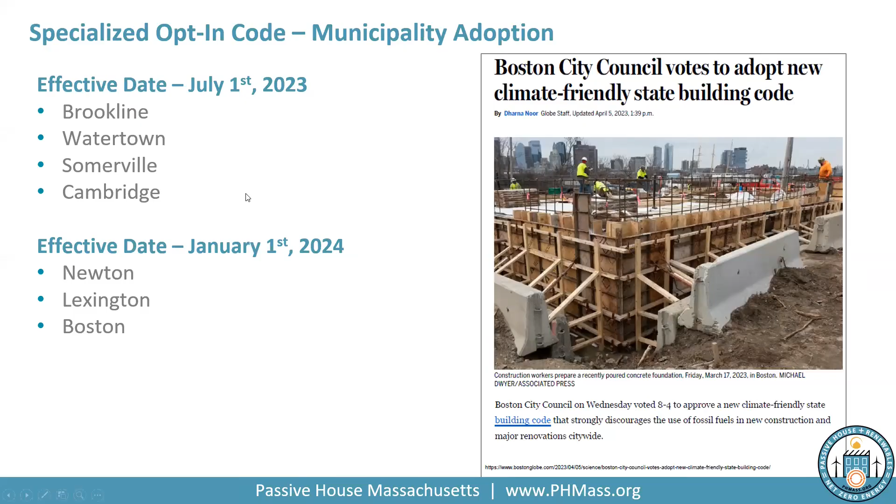So transitioning now into the meat and potatoes of our session tonight on non-residential homes. As we all know, the new code's improved pathway, passive house, is an improved pathway in the new code, both in the stretch code and in the specialized opt-in code. We've been doing a lot of talking about the residential and multifamily project implications of this, specifically with the specialized code requiring multifamily projects over 12,000 square feet to be passive house.

I don't know if folks out there know quite the implications of Boston doing this, but last year I think they had around 45 or so multifamily projects go through the permitting process in the city, and only a small amount of those were passive house. This means when it goes into effect in Boston in January, we're looking at 40-some new passive house projects, which is really exciting. But for this session tonight, the key takeaway is that it's not just residential projects we're talking about in the code.

Passive house is an improved pathway for all building types. So whether you're a single-family residential building, a townhouse, a multifamily building, or one of the many other building types out there, you can use passive house to meet code.

So tonight we want to highlight all the different types of buildings out there that are implicated by this. We're talking about schools, museums, hospitals, city halls, and other municipal buildings, all different types that can now use passive house to meet the energy code. So for those of you in different cities and towns considering the opt-in code and thinking about the impact this will have on residential projects, consider the commercial projects that will also be able to take advantage of this and use passive house to meet the code.

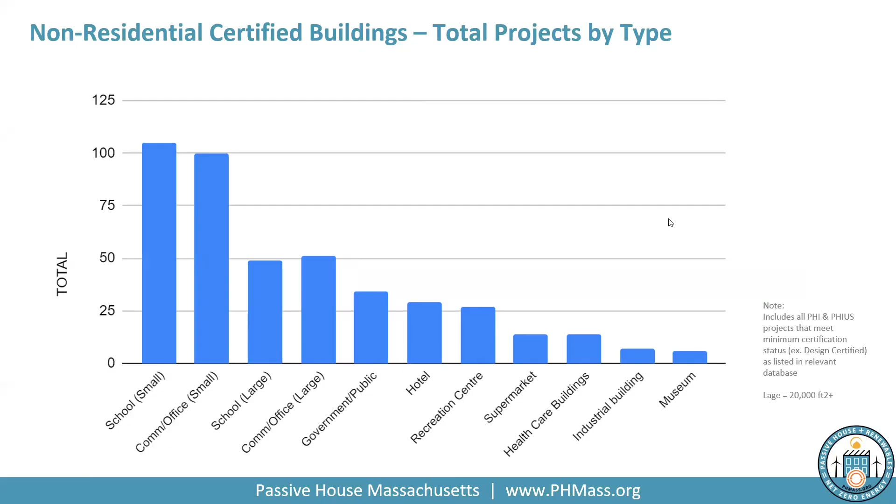That's what we have here. As you can see, there are a wide variety of non-residential projects around the world. We have some here in North America and in the US, but not as many as we've seen around the world. Part of that is simply because Passive House started in Europe much earlier than it did here, and they were much quicker to adapt it to a wide variety of building types. The first Passive House building in Germany was a multifamily building, so they went to multifamily versus single family right away, and very quickly into commercial and other building types. We've been a little slower here in the US, so all of us can work on changing that.

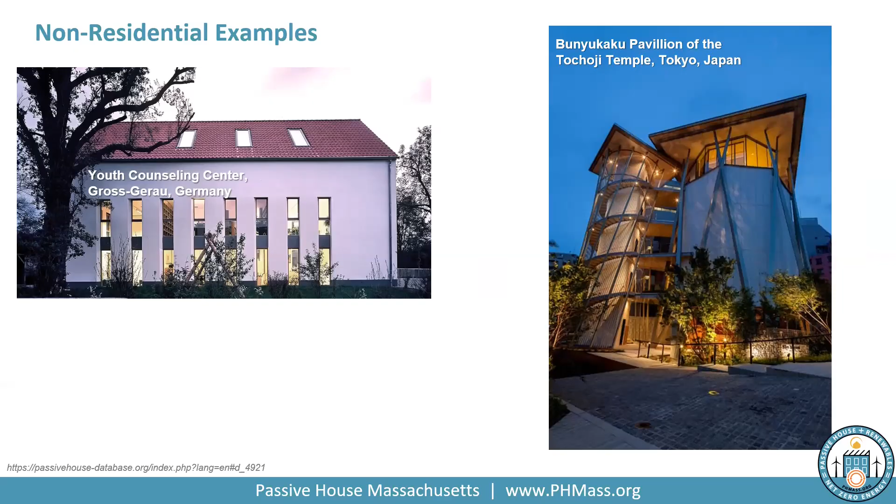All of that is inside the Passive House envelope. And they also have an ice rink, or as they call it, an ice hall, a large ice hall, that is outside of the envelope. That's the one interesting caveat with this one - they weren't quite sure how to get, this was certified with PHI, and they were working with them to try to get the whole building certified.

They actually built the ice rink mostly to what they thought could meet the Passive House standard. It just came down to the fact that at that point, PHI couldn't really figure out the right criteria for an ice rink. But one of the things this project team noted is that the ice rink itself, even though it was outside of the official Passive House envelope for certification, they utilized it in order to meet Passive House certification.

So an ice rink has a lot of cooling that is needed, a lot of energy put into cooling. So they ended up using the waste heat from that as one of the heat sources for the rest of the building. In fact, they noted, I'm looking over to my side, sorry, to make sure I get this right, that the waste heat from the ice rink provides 70% of the required heating for heating and hot water.

70% of the heating and hot water heating comes from the waste heat from the ice rink, which is a pretty kind of innovative and cool way to make an athletic and cultural center like this meet the Passive House standard. The rest of the heat, the remaining 30% for the building, comes from geothermal heat pumps.

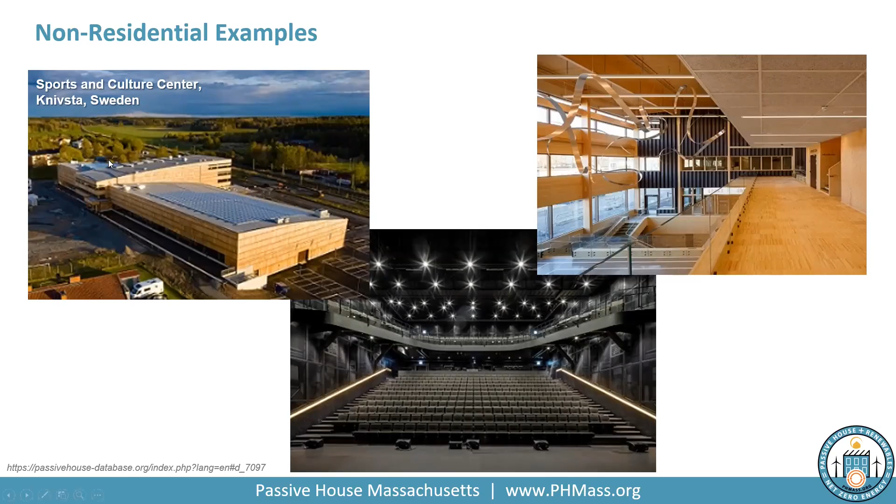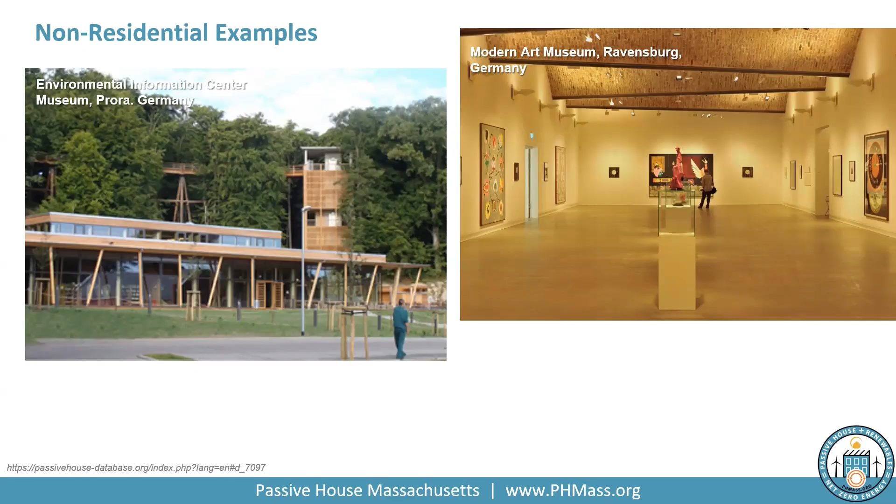They have over 14,000 linear meters of paper documents stored, which sounds like a lot to me. I'm not 100% sure. I'm not in the paper storage industry here, but that sounds like a lot. And it's critical to keep them under the right humidity and heat controls. So Passive House is what they turned to build this incredible building.

And they achieved, this is not incorrect, I'm not misspeaking here, 0.033 air changes per hour. The record for air tightness in a Passive House building here. It may be in a non-Passive House building. I'm not quite sure, but an incredible project. No windows, but they hit it there.

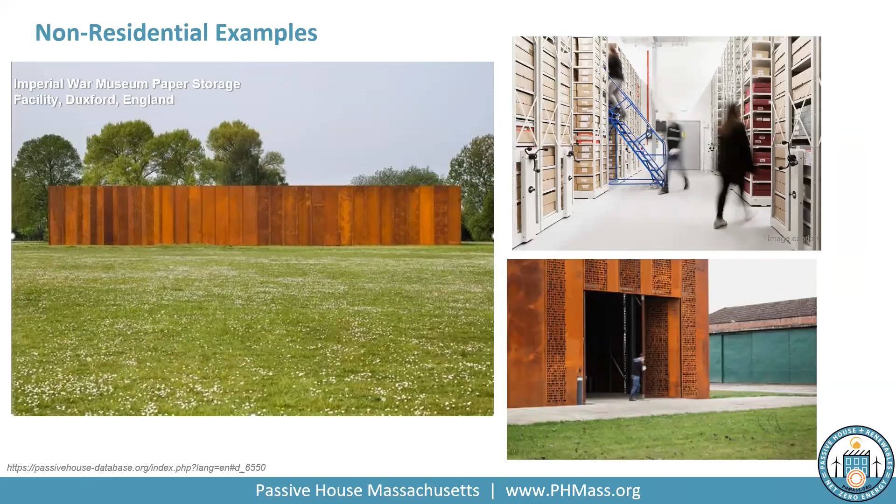I believe their heating demand was about 2 kilowatt hours per square meter, so really, really low, but they were able to do it. And again, Passive House really helped them, especially with the ventilation and heating controls, to really maintain that indoor temperature and indoor humidity they wanted.

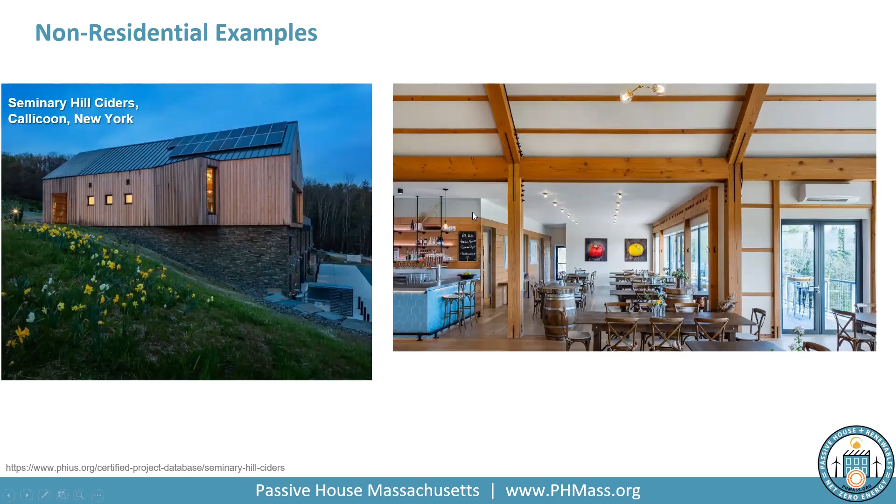This is a cidery out in New York, Seminary Hill Ciders. Hit the Passive House standard. You can see kind of just a photo of the inside. They have a restaurant, and you can go in there, have some cider. They have a bar, and all that was under the Passive House envelope. A pretty exciting project there, and one that I'm looking forward to visiting.

So those are some quick ones. Now we're actually going to dive into a little bit of longer examples, and some of these are going to have some videos so you can hear from the project teams and not just me. But this is a hospital. This is a certified Passive House hospital in Germany. Here's the details about it. You can see one of the patient rooms here. So the pretty large building, 61,000 square meters.

You can see the team. Ask questions if you have any about some of the details in the chat room, but these are the details about it. Things to notice: the air tightness, 0.13 ACH50. Incredible air tightness. And I think one of the things that stood out to me as I looked at a wide variety of non-residential projects is the air tightness. A lot of them were incredibly airtight, blowing the 0.6 ACH50 out of the water. It's really amazing to see that. But here's the hospital there.

But for those of you familiar with hospitals or healthcare, it's one of the building types that's challenging, and not because of the general reasons Passive House projects might be challenging, but because of a large amount of electricity demand for various equipment, mechanical equipment, and various medical equipment that they have to use. So here's just showing you.

So this is comparing the final energy model from Passive House, what they met, versus the EnEV, which is a German energy standard. So basically, you could think of that as comparing the stretch code to Passive House for Germany. If they didn't go Passive House, what they would have done is met this standard. And you can see how it's broken out here. So I'll just let you look over the data a little bit, ask some questions if you have them. You'll see some of the biggest areas they reduced.

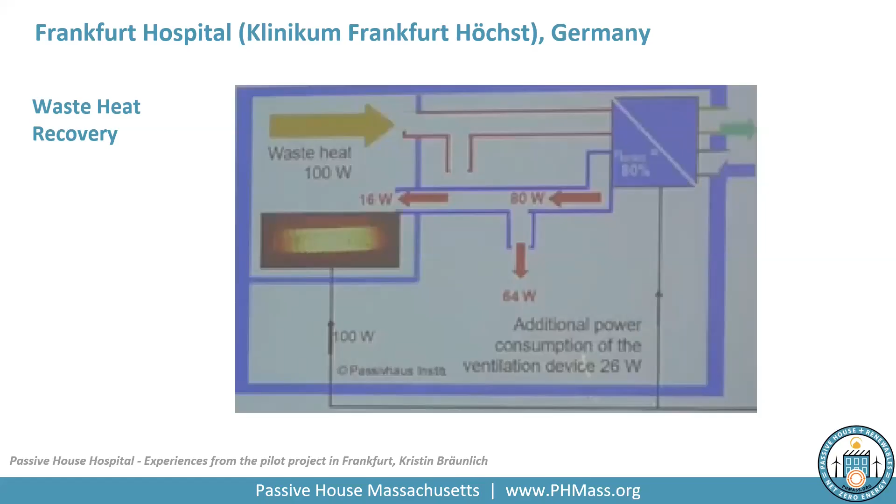They also calculated the increased energy use of running this ventilation system in order to do that, which was calculated to be 26 watts. So the question that I have gotten at times, and many folks here have had, is what's the trade-off? Yes, you can recover some of that heat energy, but at the same time, you're using a lot more energy for that process. Well, you can see it's definitely a positive trade-off for them, and one of the key ways they were able to achieve Passive House. But let's actually watch a video of it here. You may recognize some folks in this video.

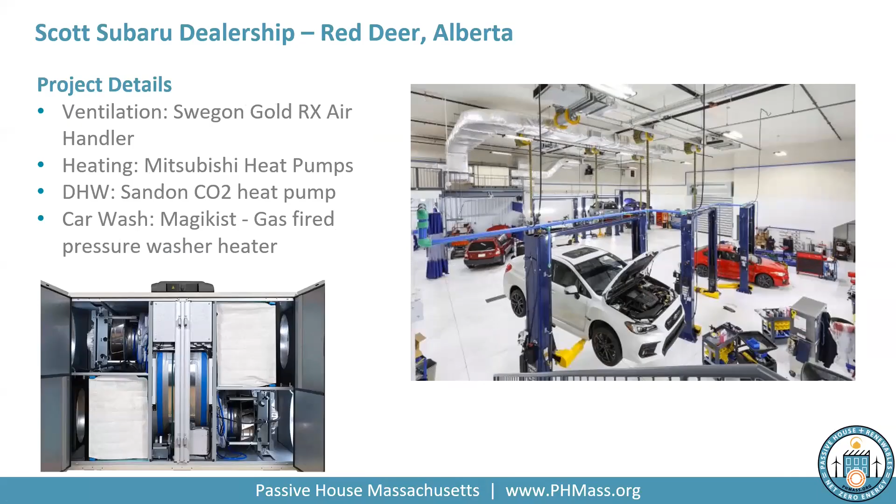That's ventilation and heating, you can see some information there on what they use. They did use the CO2 heat pump, something that's come up in some of our sessions and is being used in a couple of Boston projects now, a newer form of an all-electric hot water source. A good example of it being used in a non-residential application right here at this car dealership.

This is another video, this one's shorter, only a minute or two here. It gives you a little bit of background on why this project went to achieve passive house and some of the details on how they did it, in a very quick way.

Hi, I'm David Dodge, welcome to Green Energy Futures. We've seen some amazing super energy efficient buildings on Green Energy Futures, including living buildings and net zero churches, homes, and even department stores. But we've never heard of anyone doing what the Scott Subaru car dealership in Red Deer is doing. Hi, I'm Garrett Scott, I'm the dealer principal of Scott Subaru in Red Deer, and we are almost completed our construction of the world's first passive house car dealership.

Scott said they were inspired to do something special when they visited the Subaru plant in Indiana. Subaru America has a zero waste plant, and the plant is also sitting on kind of like a wildlife nature preserve, with incredible wetland and green spaces around it. The zero waste is pretty unique when you consider manufacturing, you'd think you're always wasting a little bit.

Inspired by the zero waste idea, Scott came back to Red Deer and talked to Cover Architects and came up with the idea of building the first car dealership built to the passive house standard. We wanted the ultimate calling card, something unique that also represents some of our values. Why waste if we don't have to? Why build something ho-hum that everybody else has done before? If you're going to be in one spot for 50 years, let's build a legacy project that means something today as much as it would 20 years from now.

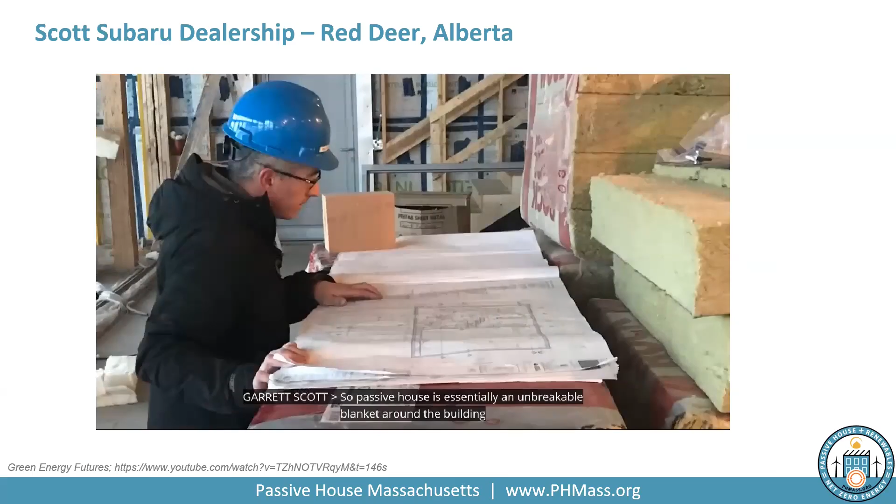So how do you take a car showroom with floor-to-ceiling windows to passive house standard? Passive house is essentially an unbreakable blanket around the building that keeps it insulated from the environment outside, and that goes for the walls, the windows, the doors, and also the foundation and flooring. You build exterior walls getting close to 20 to 22 inches thick, with 4 layers of different types of insulation and impenetrable barriers.

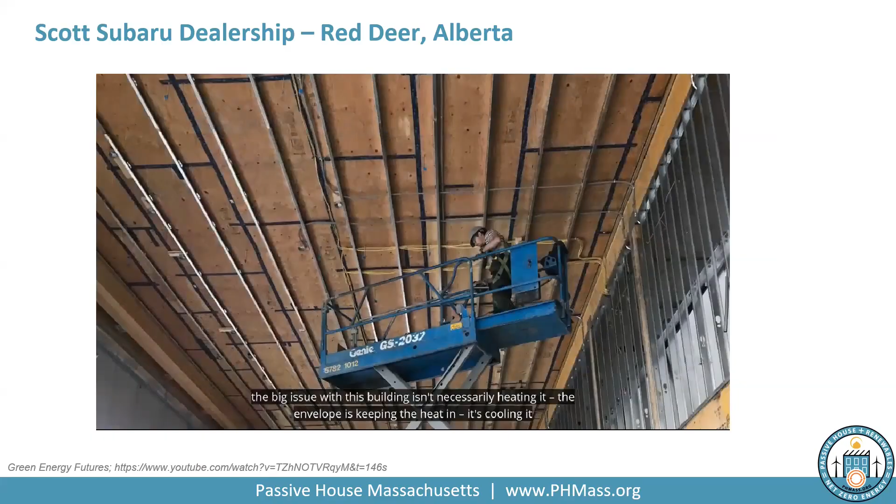All of this adds up to a car dealership that uses 80% less energy and doesn't have a conventional furnace. There are heat recovery units and super efficient air source heat pumps, which can be 200% more efficient than a furnace. With that, you get those incredibly low consumption numbers, and they're rated now to be available in Alberta for temperatures down to -30. We're very confident this will get done. But the big issue with this building isn't necessarily heating it, the envelope's keeping the heat in, it's cooling it.

These heat pumps also work in the inverse fashion, and they cool the building too. Garrett's grandfather, Kip Scott, opened the family's first car dealership in Red Deer 50 years ago. Garrett says this is a legacy project that he hopes will still be cool 20 years from now. This building will also garner more exposure than a traditional new dealership would. That's also one of the big motivators in doing this, to achieve the goals we have as a Subaru dealer: we need to be extremely unique. This helps us get there.

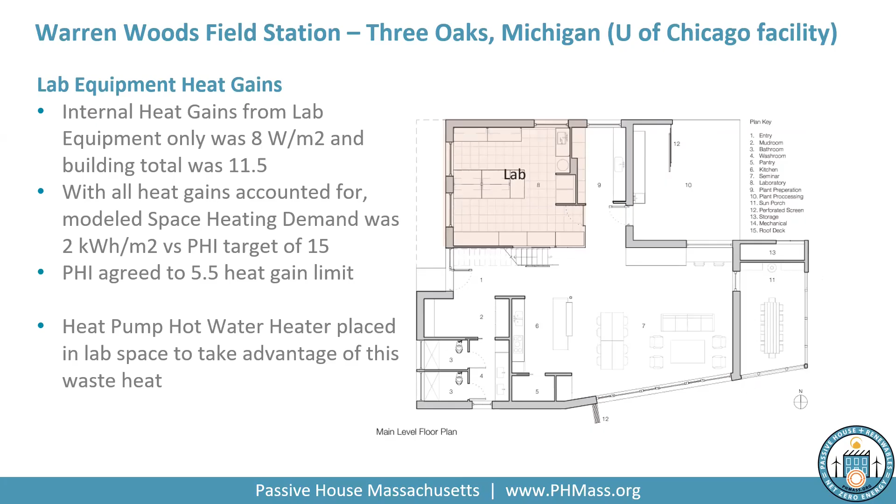And they also placed a heat pump hot water heater as the source of hot water for the building, in that lab space, so they can utilize some of that waste heat as a source for heat pump hot water. So that's this building here.

I'm going to show you now another building. This is the University of Bradford out of the UK, one of their STEM buildings, with a larger laboratory. I'm going to show you another video of this, the shortest of the three I'll show you. But I think it's interesting to hear directly from the teams as much as possible.

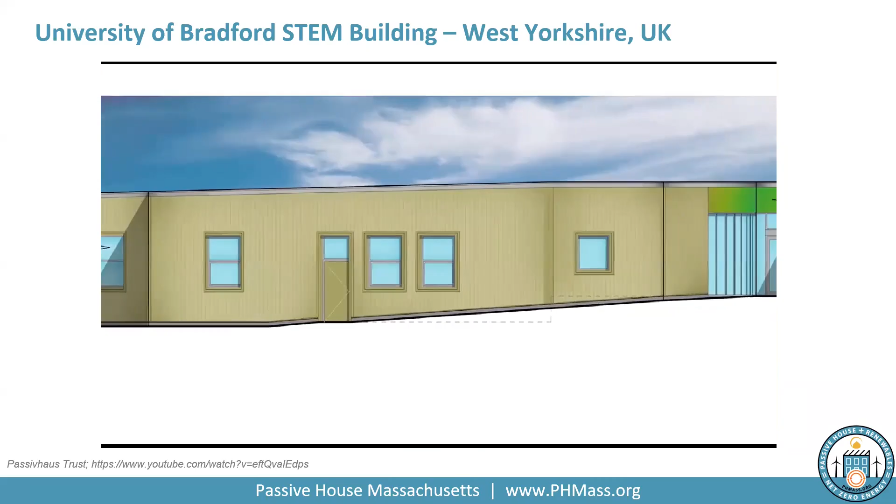The nature of it being a laboratory has a lot of additional equipment, so the primary energy demand was quite a big consideration early on. But also then to create a design that actually sat within the landscape as well, so it's not a square box as a lot of Passive House projects can be, but we tried to create a bit of flair and design and imagination. Because of the lack of passive solar benefit we were getting in terms of energy, we therefore had to increase the building fabric and air tightness levels, perhaps 20-30% over what you'd normally do for a Passive House building.

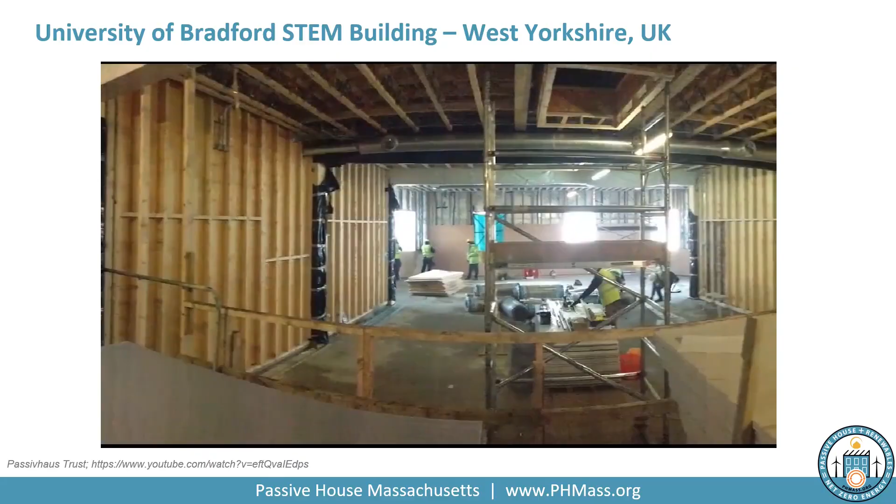The construction was largely off-site fabrication. We only had 4 skips of waste during the whole build, which is fabulous really. So there was a lot of time spent on site trying to get the details right to achieve that Passive House standard. It's a very nice building to work in, the comfort levels are quite nice. Even when we've got all of the machines on in the lab, we still don't really see any fluctuations of heat, which is a big problem in normal chemistry labs.

So yeah, short video there. I really like that last point highlighted about the comfort this building has. That remark about even when all the equipment's running, they don't see a change in indoor temperature was pretty incredible. Highlighting that, especially for these types of spaces - not just laboratories, but all types of school buildings and office buildings where people are working and spending 8 hours a day - comfort is incredibly important, and I think it should not be an overlooked reason for why these types of buildings should achieve Passive House.

It's not all about reducing energy. Increasing the comfort of these buildings goes an enormous way towards increasing the comfort of people, and as we've seen in other studies, their own cognitive performance as well. So pretty cool there. All right, a couple more projects to take a look at here.

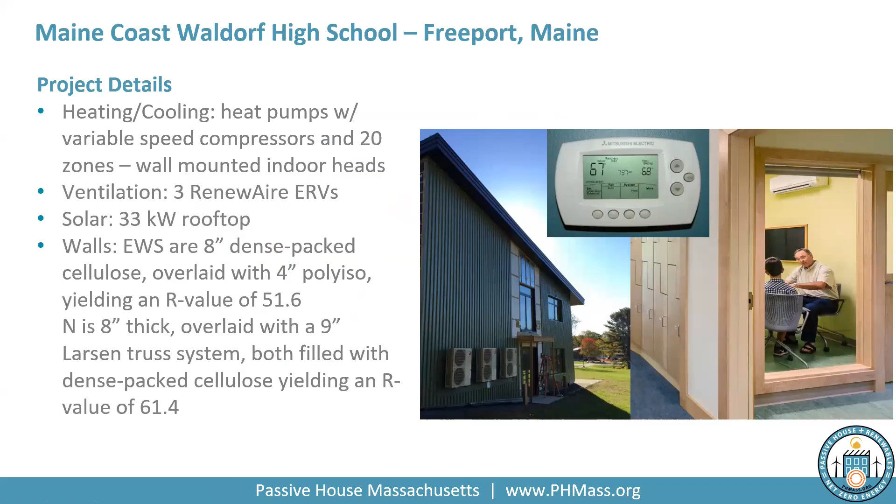So they kind of integrated two different assembly types into the same project. This one on the left shows some of those details about what they used on some of those walls. I can answer questions about that later, or you'll have this information when the presentation is available. Here it is going up right now, you can get an image of it going up when it is finished.

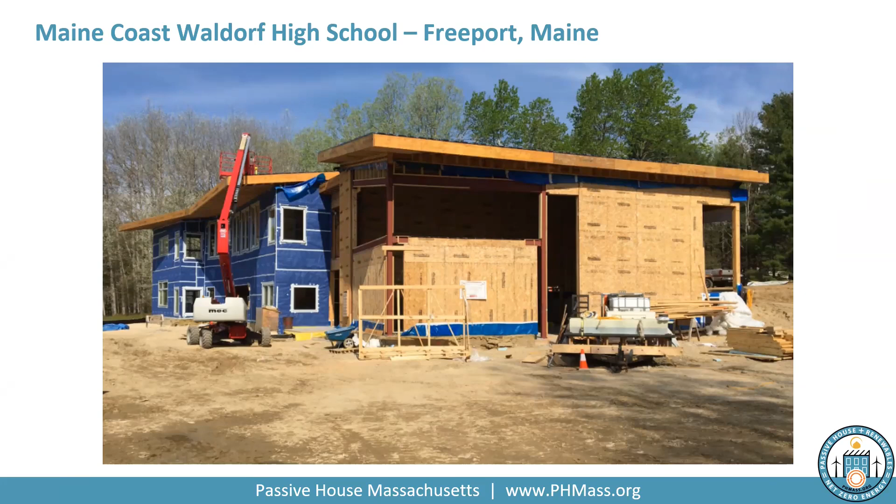Another example of different project types - as we saw in that chart, schools are the largest type of non-residential project. For a lot of municipalities building new schools or renovating existing ones, and also the enormous number of private schools in the area looking to build new buildings, Passive House is an excellent resource and a great way to go. Again, that cognitive performance highlighted in that lab building is so critical in schools, especially with younger kids.

Here, look at this building. This is an incredible place. I want to almost go back to school just to go there, but not quite.

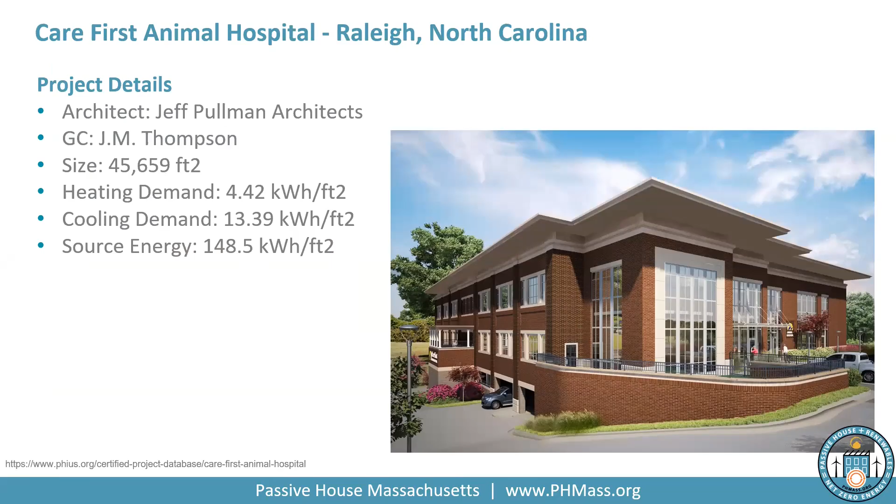All right, the last building type we're going to look at is this animal hospital, a large veterinarian clinic. It isn't quite the same as the Frankfurt hospital - this is just for animals, but it's another type of medical facility we can't forget about. This one is going up right now, it's under construction, so I'm not going to show you too much. We just want to highlight different building types to show what's possible. Here it is going up right now - you can see some images of it recently, and there it is on the outside.

So a lot of building types, a lot of different things that can achieve Passive House. This one was also going for a 193 kilowatt solar system on the roof, which is already installed, and this is in North Carolina. Well, we'll end there talking about that project.

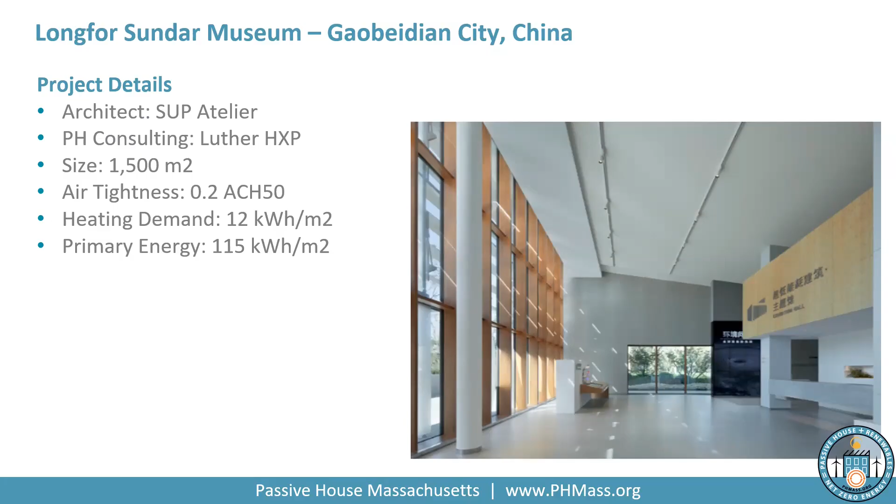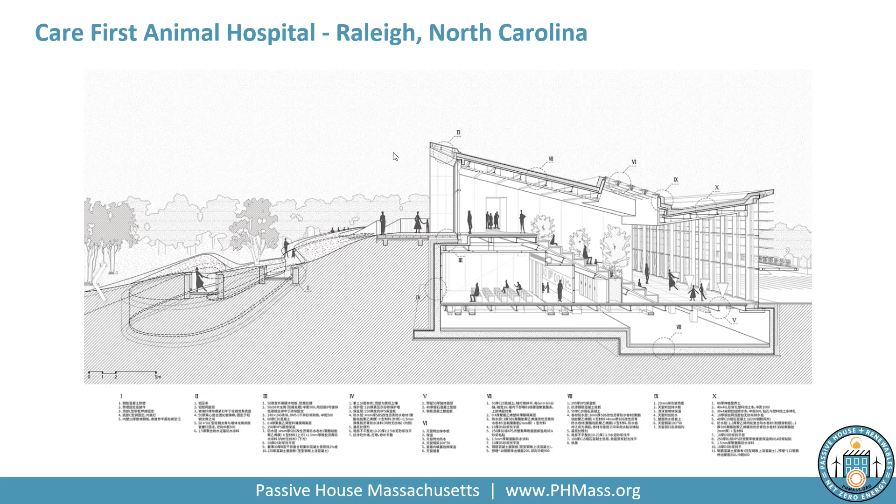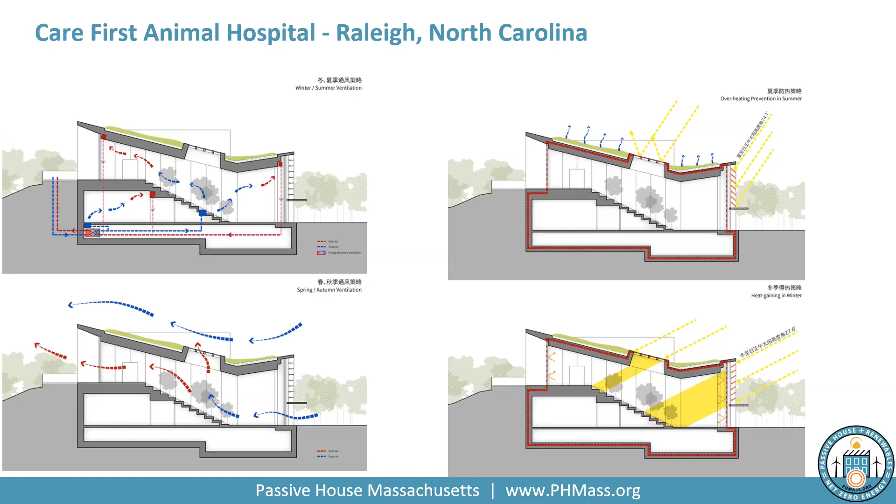Let me go back because I have one more thing to say about this. The sun shading system, it's hard to see, I don't have an image of it, but they actually have a tracker. It tracks the sun, like some solar panel sun tracker systems do. Their shading mechanisms adjust automatically throughout the day to help keep the sun from overheating the building. I think it's just a really cool example of using solar heat gain in kind of an extreme method, but they did it, and it's apparently a very comfortable building, not only passive house.

So there we are. Summary: passive house certification can be achieved by any building, any size, any function. And right here in Massachusetts it's now an approved pathway in the code. We're hoping that more building types will choose it, and we want to be a resource to help you do it. So those of you in different municipalities considering the code or looking at it, this can be any building type. That's the presentation for today.